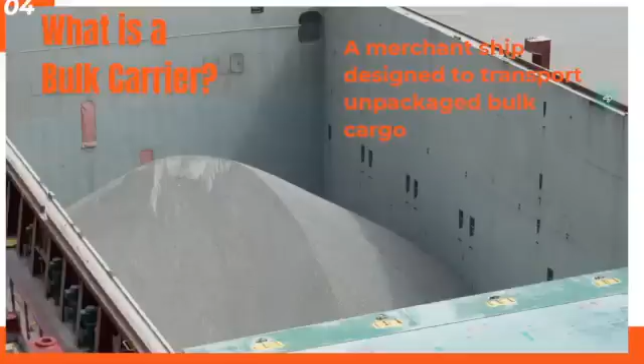We also have ore, unpacked dry bulk. We also have steel coils, and cement. Those are examples of cargo that bulk carriers transport to different countries worldwide. As I said, bulk carriers are the giants of the sea, meaning big, large, huge, gigantic.

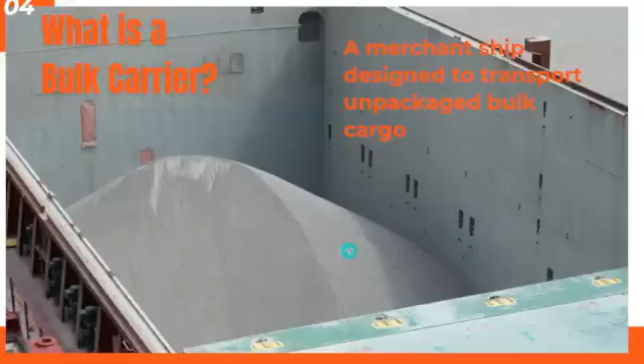As I said, the bulk carrier is also called a merchant ship. It is designed to transport unpacked bulk cargo. This is an example of cement; this is unpacked. These are the types of bulk cargo that a bulk carrier transports: as I mentioned earlier, the iron ore, the coal, the grain, for example wheat and corn, the cement, and other cargo materials. These are the different types of cargo materials that a bulk ship or merchant ship carries.

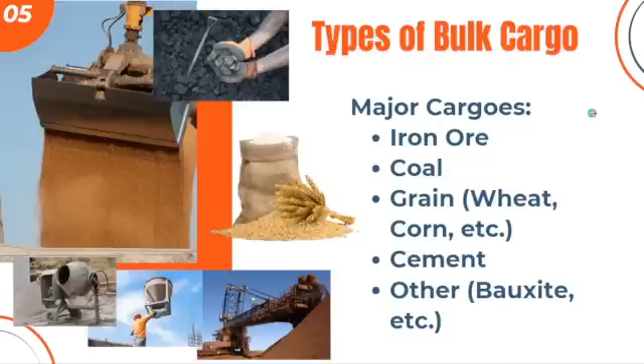So let's discuss the different types of cargo of a bulk carrier one by one. The importance of bulk carriers: when we say important, this is essential. We need this every day in our lives, whatever country you are in, you will need the products that bulk carriers transport. They are essential for transporting raw materials for industry and food. Why industry? Because they carry different types of coal materials.

As I said, coal materials are decayed plant materials from millions of years ago stored underneath the earth, and then purified, refined, and turned into power. It also generates electricity for all of us, because without this energy or electricity, we cannot continue with our daily lives. That's why the cargoes that bulk carriers transport are very essential, very important.

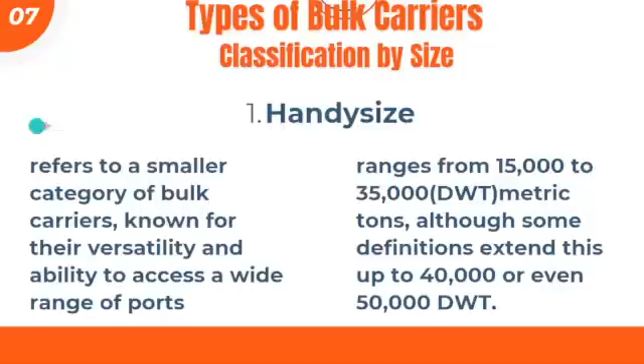It's known for its versatility and ability to access a wide range of ports. Maybe because of its size, it can travel to many small ports. Okay, so this is an example of a handy-size type of bulk carrier. As I said, it's approximately 15,000 to 35,000 deadweight. But some also say that there's handy-size that has approximately 35,000 to 50,000 deadweight.

So, the second type is a Handymax. If we have Handy Size, we have Handymax. This is a medium size type of bulk carrier, which is just a little larger than the handy size, but smaller than the Panamax type. Their size allows them to access different ports, including those with some size restrictions, because there are ports that can only allow vessels of 50,000 deadweight and below.

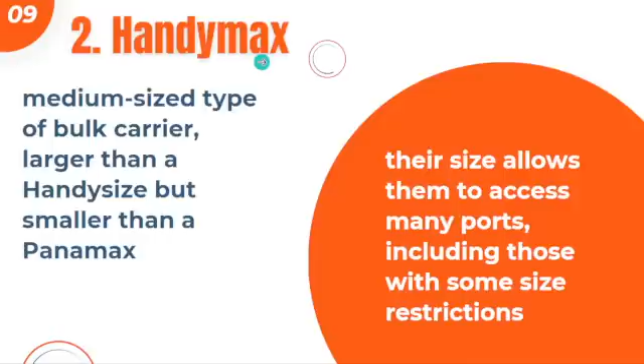So the Handymax is okay for the different ports that can only accommodate up to 50,000 deadweight type of vessels, any type of vessel as long as it's 50,000 and below. So Handymax can access many ports, like the handy size. So this is the type of Handymax.

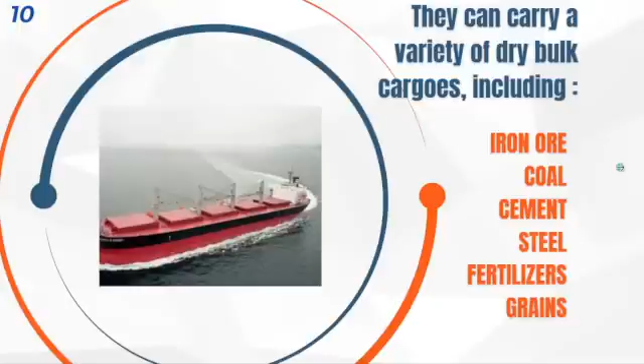They can carry a variety of dry bulk cargoes, like iron ore, coal, cement, steel, fertilizers. These fertilizers are used for different kinds of plants and for the animals also. And the grains. So this is an example of a Handymax. So number one type is handy size, we have handy max, the medium size.

And the third is Panamax. I'm pretty sure everyone has heard of this type of bulk carrier. This is an example of a Panamax bulk carrier. This is also a medium-sized type of bulk carrier. By the name itself, Panamax, it is designed to transit or pass through the Panama Canal. Now, how heavy is the Panamax bulk carrier? It ranges from 60,000 to 80,000 metric tons.

This is a little bit heavier than the Handymax. Because, as I said, the handy size is around 15,000 to 35,000 or up to 50,000 metric tons. The second one is the Handymax, which is 50,000 but smaller than Panamax, because Panamax is approximately 60,000 to 80,000 metric tons. Now, the very important description for Panamax is that it is designed to transit the Panama Canal. That is why it is called Panamax.

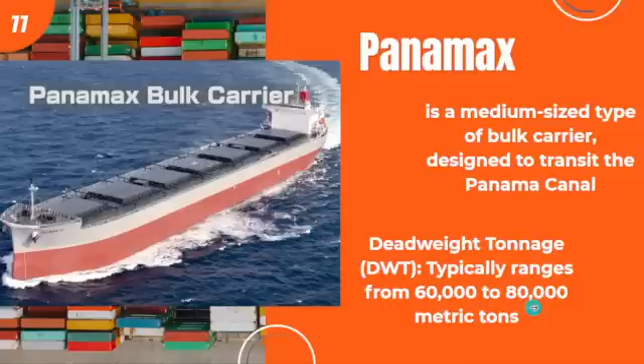Why? Because it's over 150,000 metric tons and can also reach up to 400,000 metric tons. Could you just imagine how big a Cape size is? The Panama Canal can only accommodate vessels up to 60,000 to 80,000. So the Cape size is twice as big as the Panamax, right? So it really cannot transit through the Panama Canal because it's too large. It's huge. And the advantage of the Cape size is that they can carry very large quantities of cargo.

So, making them save for long distance transport of raw materials. Meaning, why is it an advantage over other types of vessels? Because since this is a very big type of bulk carrier, it can carry large quantities of cargo. So the renter of the ship, or the one using the ship, can save because this type of vessel can load large quantities of cargo. So you can save basically for one trip, for one voyage.

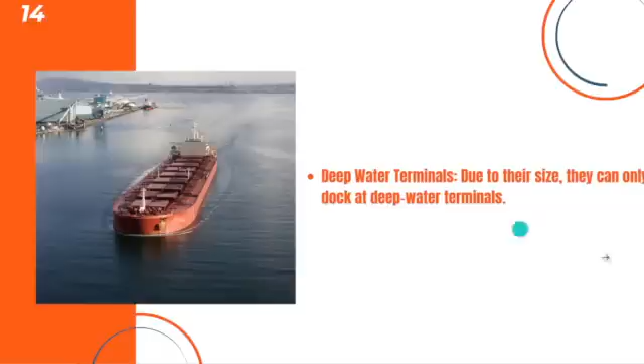But aside from that, there are only restrictions, of course, when it comes to port rules or terminals. But from the other side of the situation, it's really economical because of its size. So the common routes for this include Brazil, Australia, South Africa to China, and South Africa to Europe.

So this type of vessel, the Capesize, travels around the Cape of Good Hope or Cape Horn to travel between oceans, using deep water terminals due to its size. So, if we have Capesize and we thought that it's the largest, we still have two large types of bulk carriers.

We have the very large ore carrier, which we call VLOC. And we also have the ultra large ore carrier, which we call ULOC. So we have VLOC and ULOC. Let's discuss the difference. This refers to the largest types of bulk carrier, specifically designed for the transport of vast quantities of iron ore over long distance voyages.

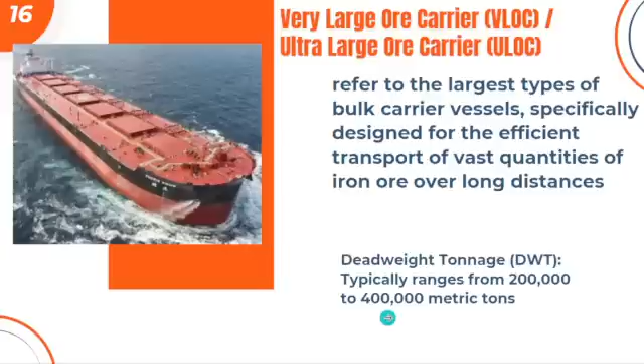Now, the deadweight for this is around 200,000 to 400,000 metric tons. So we thought that Capesize is the largest, but it's not. We still have two more types that are very large. For the Capesize, it's 150 to 400. But for the very large ore carrier, VLOC, or the ULOC, it's 200 to 400 thousand metric tons.

So, let's have a short review. We have the types of bulk carriers. Number one, we have the Handysize. We have the Handymax. We have the Supramax for the third. The fourth type is the Panamax. The fifth type is the Capesize. And we have the VLOC and the ULOC. So we have 7 types of bulk carriers.

So, as previously discussed, there are specialized bulk carriers, designed for specific cargo types and operational requirements. Number one, we have the geared bulk carrier. Again, specialized bulk carriers are designed for specific cargo types and operational requirements. Now, what are those types? Number one, the geared bulk carriers.

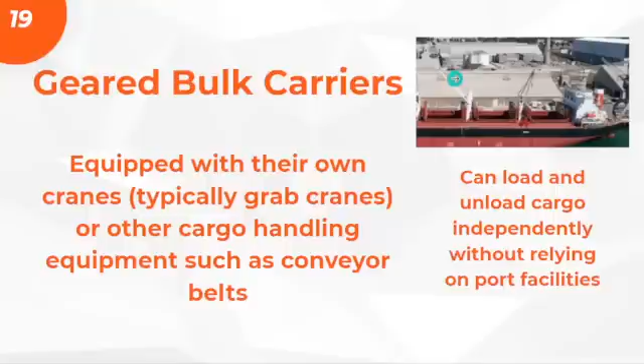So a geared bulk carrier can load and unload cargo independently without relying on port facilities. Because this type of geared bulk carrier, as mentioned, can do its own loading and unloading of cargo, because they have their own crane, which is used for loading and unloading.

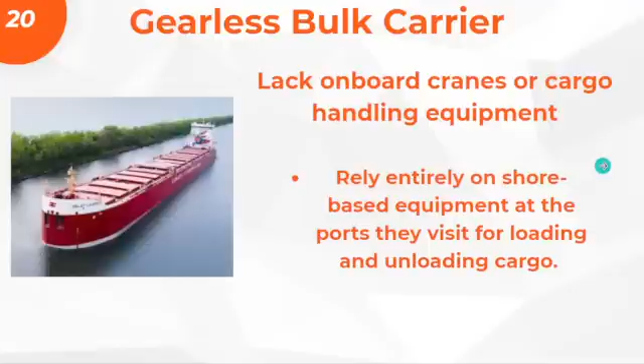So if we have geared, we also have the gearless bulk carrier. This one is the gearless type of bulk carrier. This type of carrier purely relies on shore-based equipment, because they don't have their own cargo handling equipment or cranes. That's why it's called gearless. Geared carriers have their own onboard cranes or cargo handling equipment, but gearless ones don't. They purely rely on shore-based equipment.

And then we have bulk carrier structure and parts. We call it the overall structure. We have the hull.

We have the deck. We have frames. We have bulkheads. We have double bottom and tanks. So, these are the overall structure of a bulk carrier. Now, we will discuss this one by one, so that everyone has an idea. These parts or structures are important. These are all important.

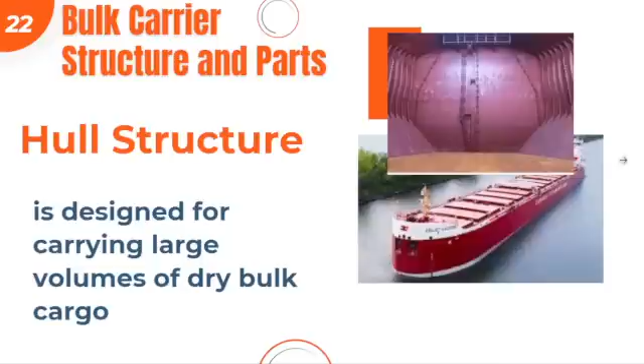And in the hull structure, there's a keel. This is the main structural member. This is the keel, this one. There are different types - there is a very thin keel, there is a little bit larger, and this one. This is the main structure, or the backbone. Like our body, we have our spine, that is the backbone of the human being.

And for the ship, we have this one. This is the backbone, this one and this one, running along the center line of the bottom plate. Yes, this one, that is the backbone. It looks like our spine, for us humans, because if we don't have the spine, we cannot stand up. We cannot do anything. That's why it's also called the backbone of a human being.

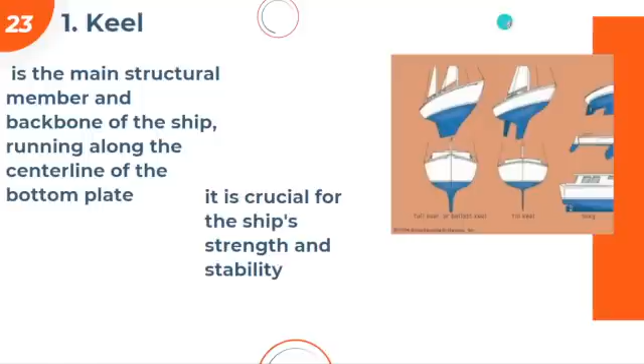But for the ship, it's called keel. Yes, it is also very important, because of the strength and the stability of the ship. It's called keel, main structure of the ship, or the backbone. So without this, the ship will not - well, you know what will happen.

So, the second structure, internal structure, is called the frames. Of course, the frames that provide support and the shape of the hull. We have frames, this one, those are the frames. As compared to human, it's also like our bones. Our bones. So for the ship, it's called frames.

Internal structure. So for number 3, we have shell plating. When we say shell plating, it forms the watertight outer skin of the hull. Like us, we have our skin, this is also compared for the ship, it's the shell plating. Now, since shell plating is the outer part of the hull, it should be watertight. It must be strong, strong enough to withstand hydrostatic pressure, pressure coming from the water, from the sea, and the wave, the impacts of the wave.

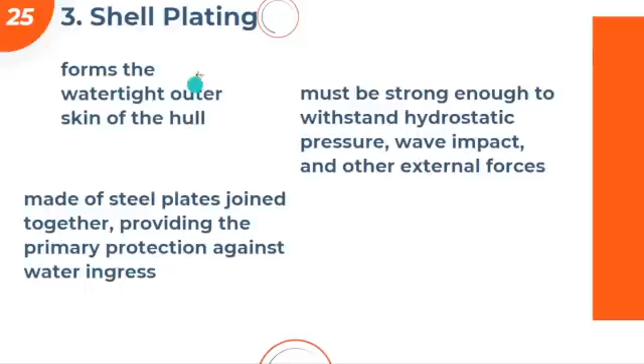And other external forces. So these shell plating are made of steel plates that are joined together to provide primary protection against water ingress or water impact. Again, shell plating is very important also. It is made of steel plates that are joined together to provide protection from the water impacts, from the wave, or from other external forces, and it should be watertight. We can compare this to our skin.

So, what are the main parts? We have cargo holds. We have hatch covers. We have superstructure. And we have propulsion system. We also have steering gear. We also have a mooring and anchoring part. And we have cargo handling gear. And we have a ballast system. And lastly, we have a bow and stern. All of these are the main parts of a bulk carrier. So, I will discuss it one by one to all of you.

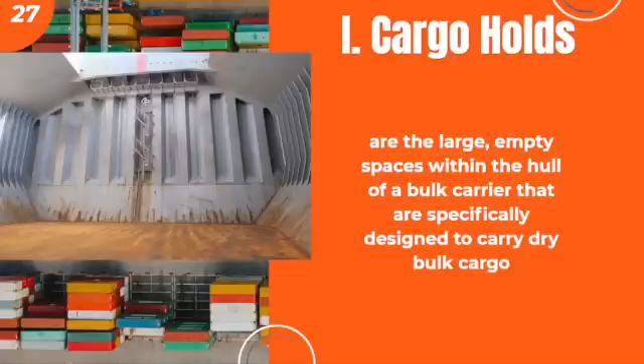So, we'll start with cargo holds. When we say cargo holds, these are the large, empty spaces within the hull of a bulk carrier, that is specifically designed to carry the dry bulk cargo. All the cargoes are put in here. That is what you call cargo holds. This is very large, and it should be watertight, so no water can pass through here. It should be watertight because these cargo holds carry bulk, dry cargo.

So this one should be watertight. Now this is very important. Why should it be watertight? Because these hatch covers are the ones protecting your dry cargo. Whatever weather you encounter while sailing, it should be protected. Your cargo must be protected because you are carrying dry bulk cargoes. So it should be watertight, preventing water from entering these holds. Is that clear?

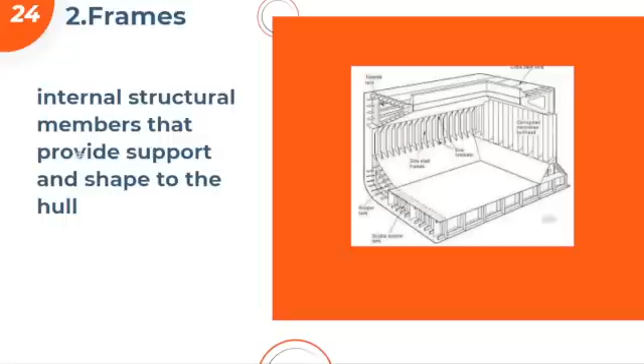The superstructure houses the navigation bridge. I'm pretty sure you know about the navigation bridge or wheelhouse, which is also called the navigation center. This is where the steering wheel is placed, along with the radar and all the computers. This is where the ship is steered and controlled.

Also, it houses the accommodation. When we say accommodation, it's where the crew sleeps, the living quarters of the crew, including the cabins, mess rooms, and recreational areas. That is what the superstructure is, where the accommodation is placed.

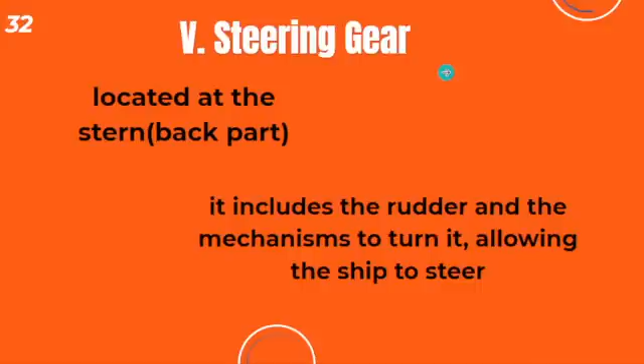We also have the steering gear. This is located at the stern or the back part also, because basically the superstructure is located at the stern, where the navigation bridge, the accommodation, and the engine room are located. The steering gear includes the rudder and the mechanisms to turn it, allowing the ship to steer, meaning turning it to the right or to the left. That's the purpose of the steering gear, located at the back part of the ship.

We also have the mooring and anchoring equipment. Let's discuss that one by one. When we say anchor, this is of course the logo of a seafarer. This is the anchor, heavy of course, that is dropped to the seabed to hold the ship in place.

Number 2, we have the winches. The winch is a mechanical device used for controlling the tension of the ropes or wires. This part is very strong, the winches. This helps to pull or lift heavy things by using a rope or a cable.

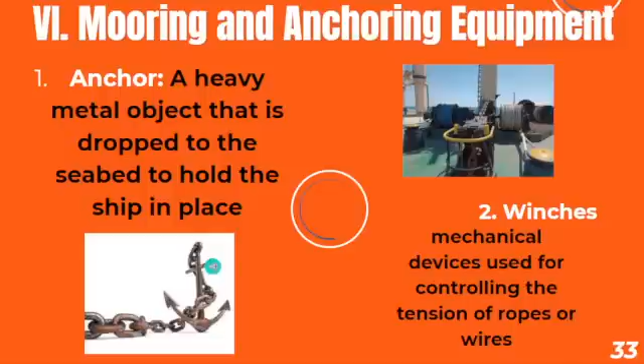Those are the mooring lines. These are ropes or wires used to secure the ship whenever you dock. So mooring lines are responsible for securing the ship, while the anchor is responsible for holding the ship in place. This one. So they have different functions: this one to secure the ship, and this one to hold the ship in place.

So the primary purpose of the mooring lines is to prevent the ship from moving freely, maybe because of the waves, or the current, or the wind, and of course other forces exerted during cargo operations. So again, mooring lines are the ones responsible for securing the ship.

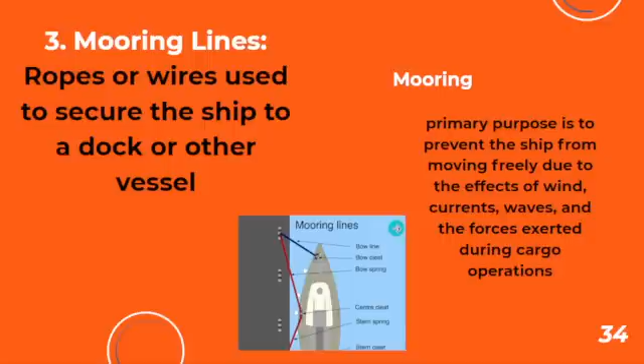Now, when we say mooring, the primary purpose of that is to prevent the ship from moving freely due to the wind, the waves, the current, and other forces during cargo operations.

So let's continue with the parts of a hull. We have here the cargo handling gear. This is only for small bulk carriers, like Handysize and Handymax.

This type of bulk carrier, the handy size and the handy max, they have their own cranes for loading and unloading cargo. But for the larger vessels, like the Capesize and the VLOC and the ULOC, they usually rely on shore-based equipment. They don't have cranes, because of its size they cannot accommodate an additional crane. That's why they purely rely on shore-based equipment. But for the smaller bulk carriers, they have their own cranes for loading and unloading cargo.

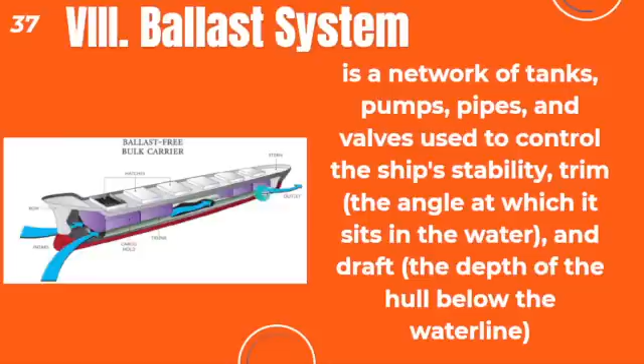Again, a ballast system - this is a network of tanks. There's also a pump, there's also a pipe in there, and there's also a valve there, valves, to control the trim and the stability of the ship. Stability, very important.

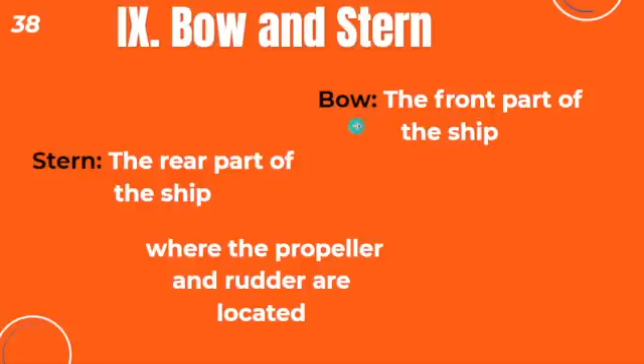Let's go further. So we have bow and stern. Bow is the front part of the ship. And the stern is the rear part of the ship, where the propeller and the rudder are located. So bow, the front, the stern, the back, wherein the propeller and the rudder are located. Bow, wherein the hull and everything in front is located here.

Alright, we're done. So we have now a short quiz. Let's have a short quiz, just try to recall everything. But anyways, we will answer this one by one. So for number one, short quiz.

It says here: what type of cargo do bulk carriers primarily transport? Bulk cargo, bulk carriers - what type of cargo do they transport? For letter A, is it liquids? Is it passengers? Next, is it unpacked dry goods? Or is it containers? So what do you think, everyone, for the bulk carriers?

It's very fresh, we just discussed this earlier. Yes, it's letter C, it's unpacked dry goods, right? So bulk carriers only carry or primarily transport unpacked dry goods. Next.